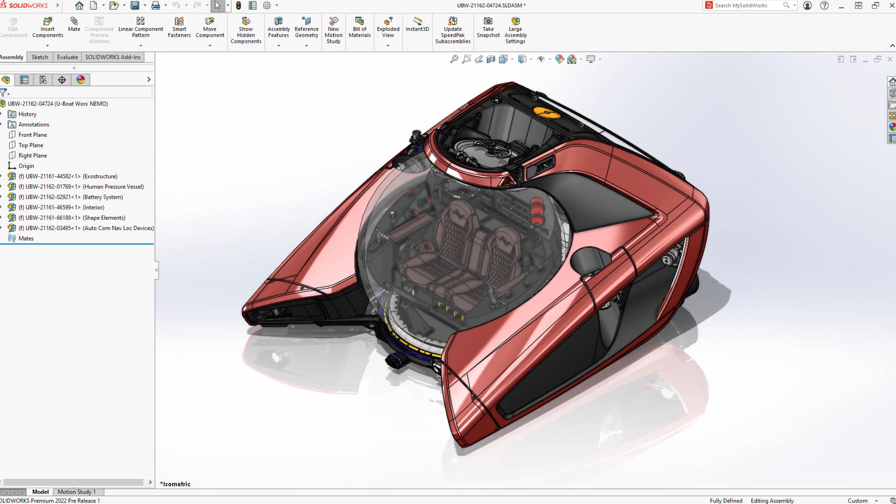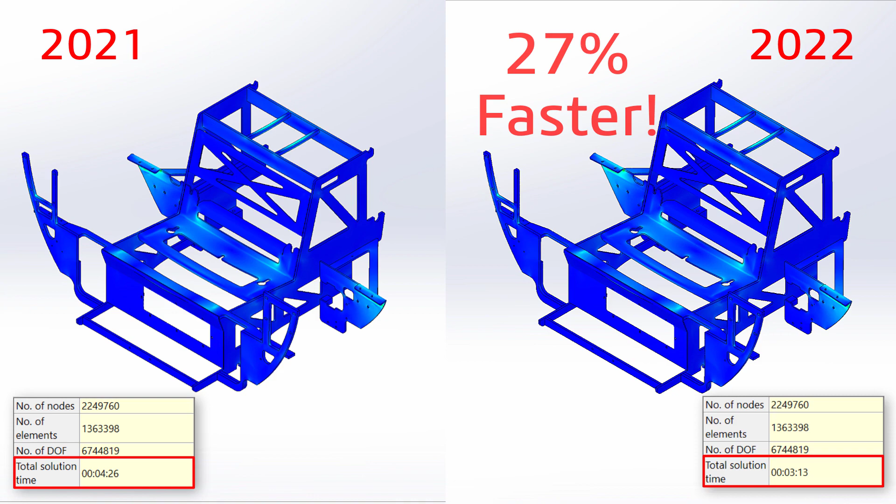SOLIDWORKS Simulation 2022 adds new capabilities that simplify analysis setup, improve performance, and increase the accuracy of your simulations. The internal frame of the Nemo personal submarine contains a large number of bonded contacts. Solve time for this type of geometry is now over 25% faster than Simulation 2021.

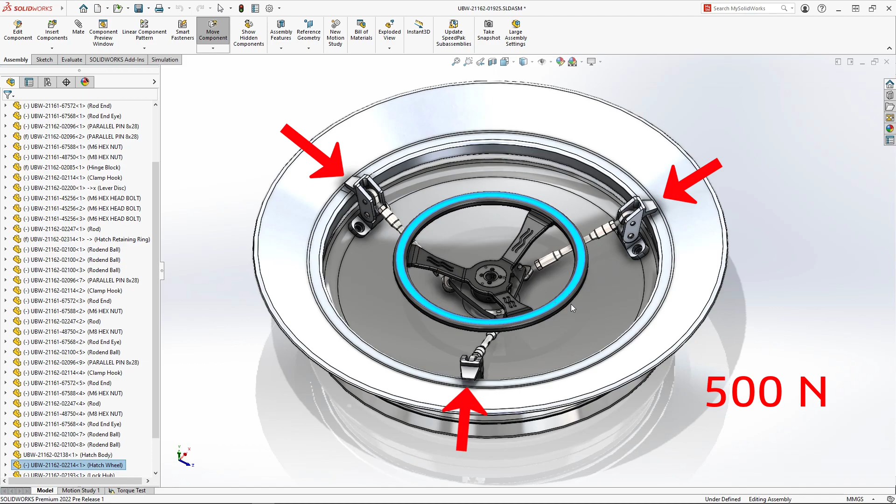The Nemo submarine utilizes a specialized hand wheel to secure the hatch while diving. Engaging the latch fingers requires a minimum of 500 newtons of contact force. This would ensure almost any passenger is capable of applying enough torque to properly seal the craft.

Taking advantage of cyclic symmetry by cutting the model down to a third will save setup and solve time. The model can be further simplified by removing this tie rod and replacing it with a new type of virtual connector, the Linkage Rod.

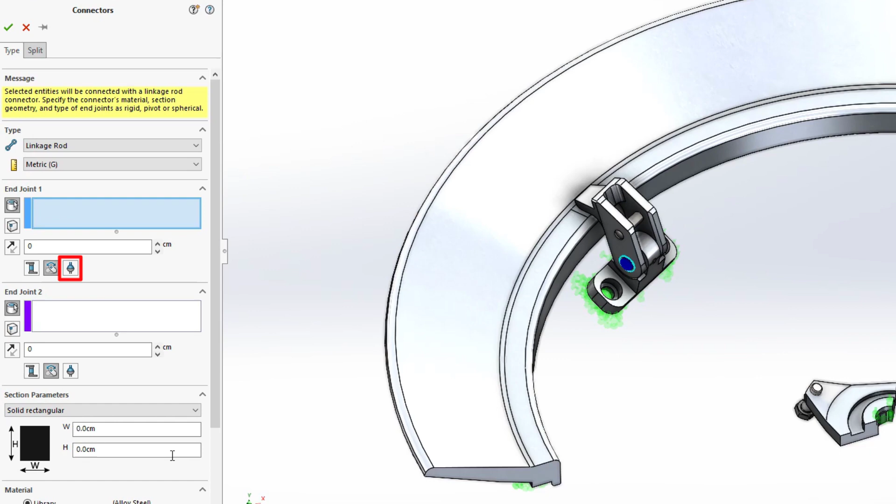The Linkage Rod connector accepts either cylindrical faces or vertices to represent the rod ends. The end conditions can be defined as either fully rigid, pivotal, and even spherical. We'll select cylindrical faces and spherical end conditions to properly simulate the function of the tie rod. We can even choose from several cross-sectional shapes and define the section dimensions.

SOLIDWORKS Simulation 2022 now defaults to the powerful blended curvature-based mesher, which can now accept mesh control values outside of the maximum and minimum global size range. This means you can refine or coarsen the mesh in any region without limitations, helping us reach that optimum balance of solve time and accuracy.

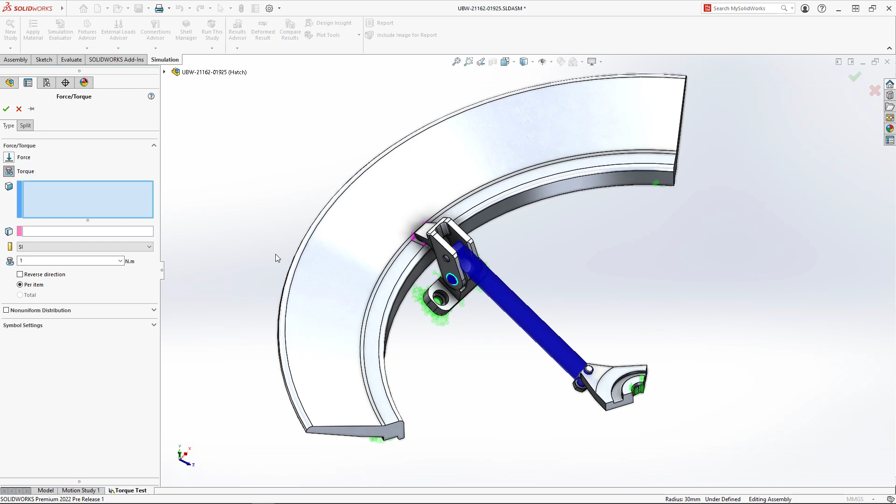Next, we'll apply a torque to the center rotor. The 5th percentile of humans can apply 16.5 Newton meters of torque to a steering wheel of this size. Since we're analyzing a symmetric model, we'll cut that value into thirds.

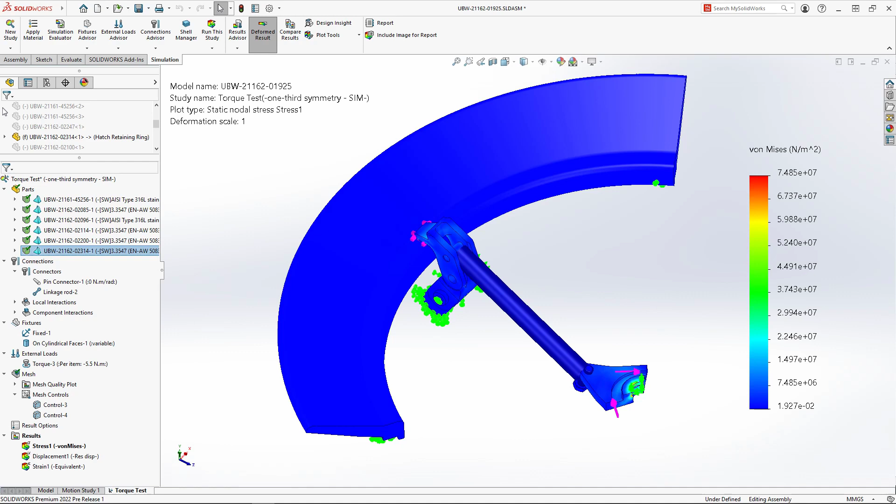After running the analysis, we can review the shear, axial, and bending loads of the virtual linkage rod, as well as solve for the contact reaction force developed between the latch finger and the latch flange. Multiplying this contact force by 3 is less than the 500 Newton requirement to properly seal the hatch. The design needs to be changed.

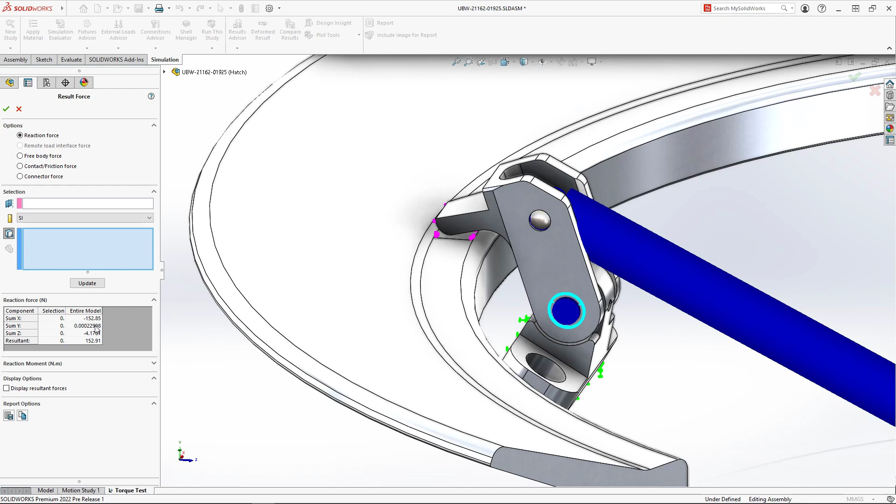Let's try moving the connecting rod attachment 10 millimeters further away from the pivot. This should add additional contact force without requiring additional torque. Success! This small change increased the contact force by 38%. We're now safely past the 500 Newton minimum.

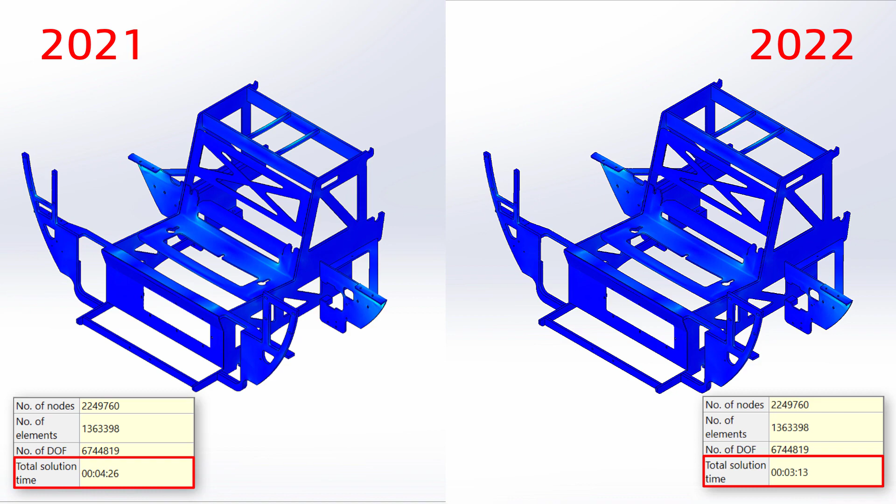SOLIDWORKS Simulation 2022 adds new functionality that refines the setup process and provides under-the-hood enhancements that speed up performance and increase solution accuracy.